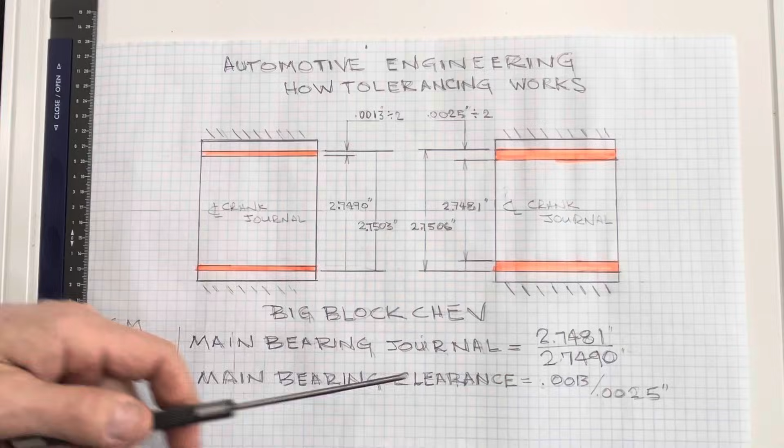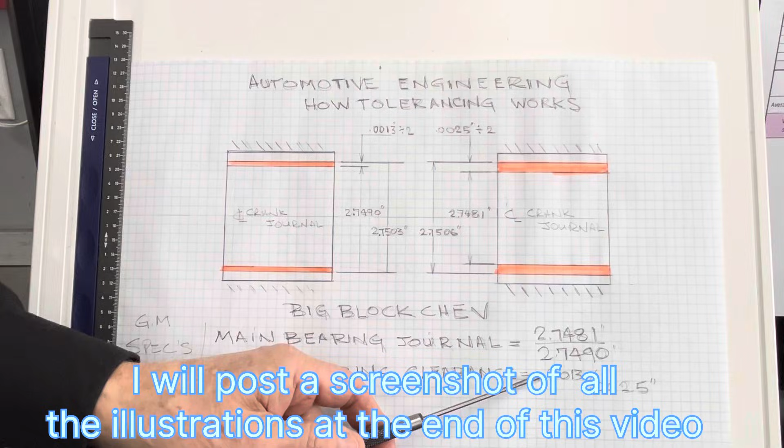So there's the crankshaft. Even though the main bearing journal crankshaft nominally is 2 3/4, it could be anywhere from 2.7481 on the low side to 2.7490 - so almost a thousandth, 9/10,000ths of an inch variation. Then the main bearing clearance, factory OEM, is 0.0013, 1.3 thou, to 0.0025.

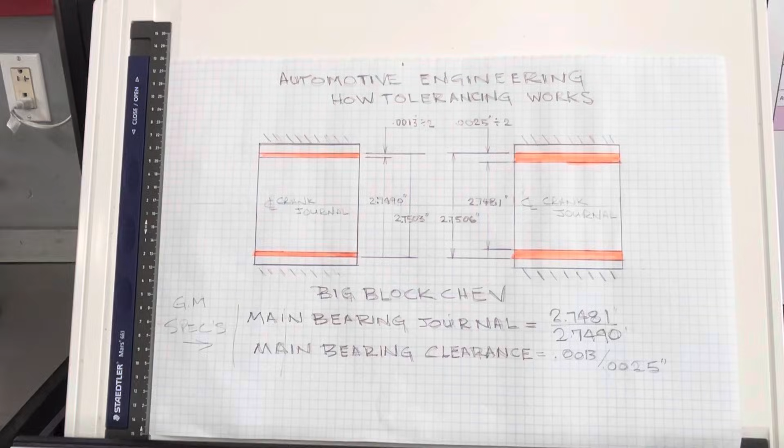So it could be as low as 0.0013 to 0.0025. When we blueprint an engine, we do a couple things - typically we add a little more clearance, but you have to be careful, you can't add too much, and I'll show you why.

If the clearance is too tight, 0.0013 would not be acceptable for Al's 454, because that's not much clearance - the oil can heat up too much, there's not much space, it can't support it. In a high stress situation, the crankshaft may touch the bearing, and once that happens, it's game over.

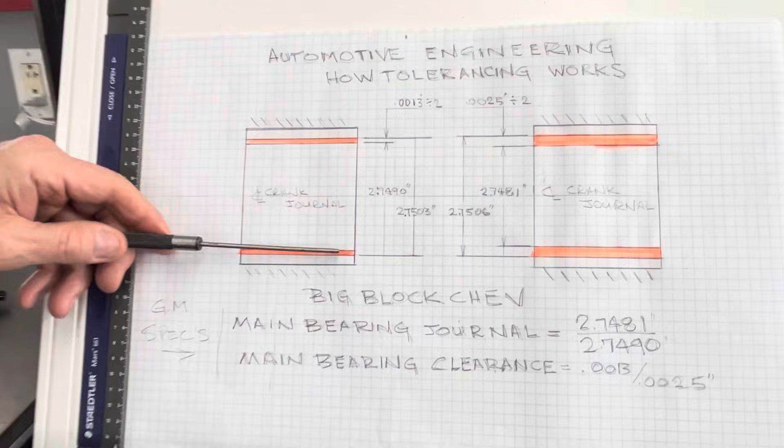Let's look at that application right here. So what I've done is I've drawn - the only thing I painted is the orange line, and that is the oil flowing. That's your crankshaft journal, this is your bearing here, that's your crankshaft journal, and that's the oil film.

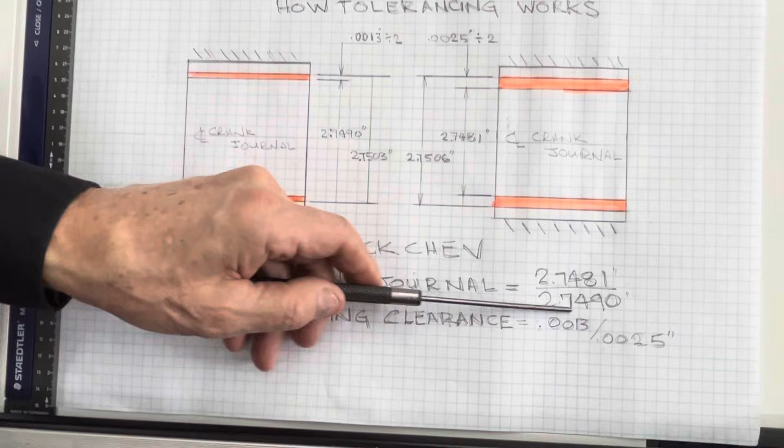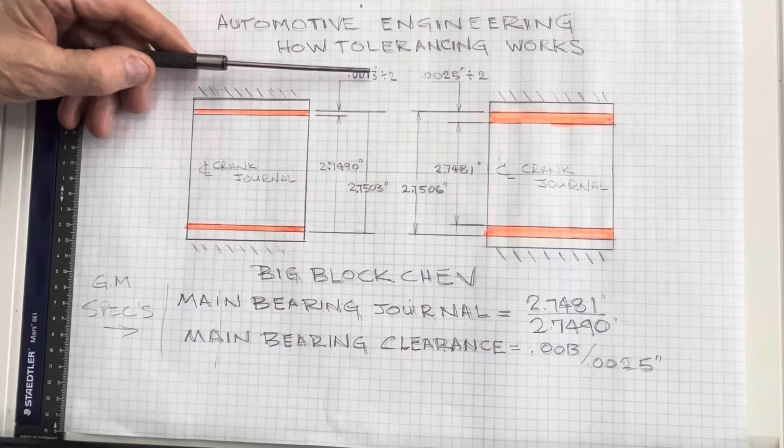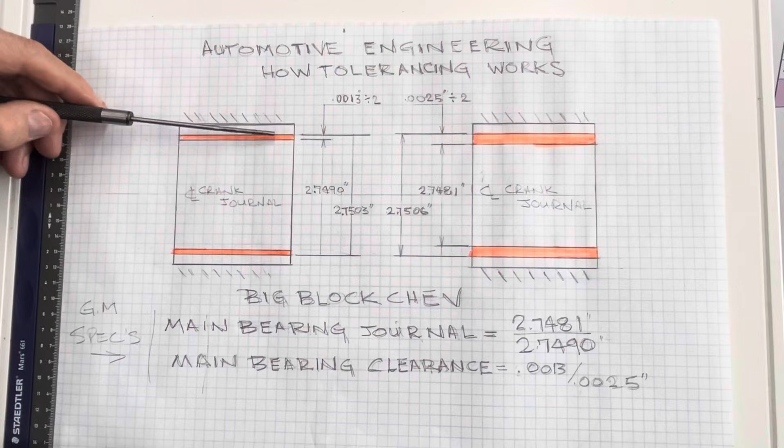So the automotive factory tolerance is, if we have the largest crankshaft journal, that's 2.7490, and the smallest bearing, then we only have 0.0013 of clearance. Remember that clearance is divided by 2 because half of it's got to be on each side of the bearing. When you take the dimension, the difference is 0.0013, so only half of that is on each side. So the film of oil between the bearing and the crankshaft journal is less than 1/1000th of an inch if you follow the factory tolerance.

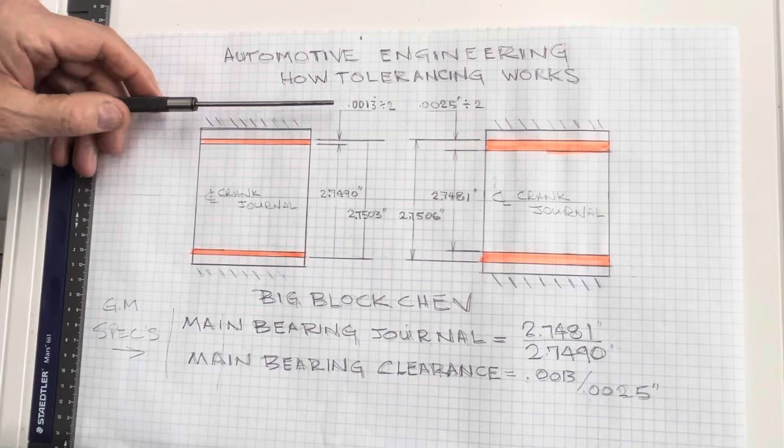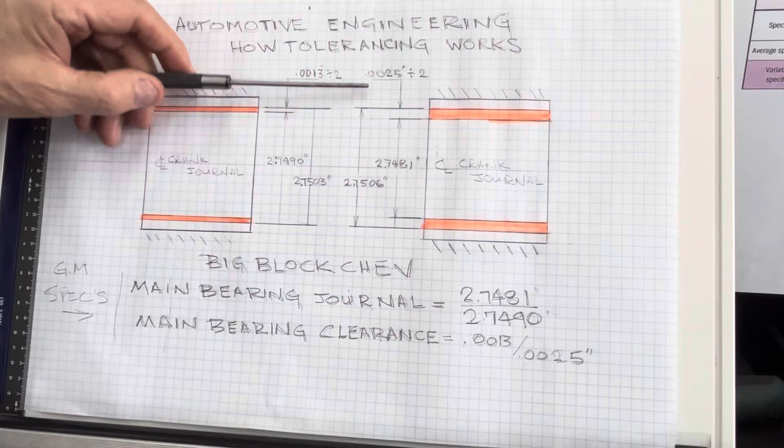So in the factory, they're okay with that, and there's lots of engines running around with 0.0013 clearance doing fine. The next side of the factory tolerance would be if you had the smallest diameter crankshaft, 2.7481, and the largest bearing. Then you'd have 0.0025 clearance, divided by 2, with half the clearance on this side and the other half on that side.

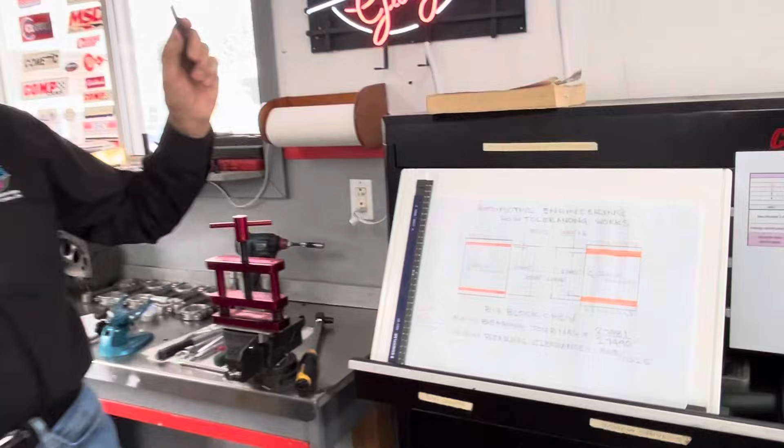So that's more desirable. The other thing is you have a variation from 0.0013 to 0.0025, 12 thousandths of an inch allowable variation. So in blueprinting, we do a couple things: we want a little more clearance, and we don't want as much variation. That's the OEM tightest and loosest side.

Now, if you're too loose, there may not be enough oil volume flow. Oil pumps don't make pressure, they make volume. The pressure is created when you have resistance. There wouldn't be enough to support the bearing. In an ideal world, the crankshaft journal never touches the bearing. In reality, it doesn't, and it shouldn't, other than instantly after startup maybe, because when you shut down, the crankshaft may sink into the bearing. But when it's turning, it's going to be off that bearing, so that's how it should work.

However, when we blueprint, I don't want a range of 0.0013 to 0.0025. Ideally, for an application like this for Al, 0.0025 to 0.0030 is an ideal clearance for a main bearing for Al's 454.

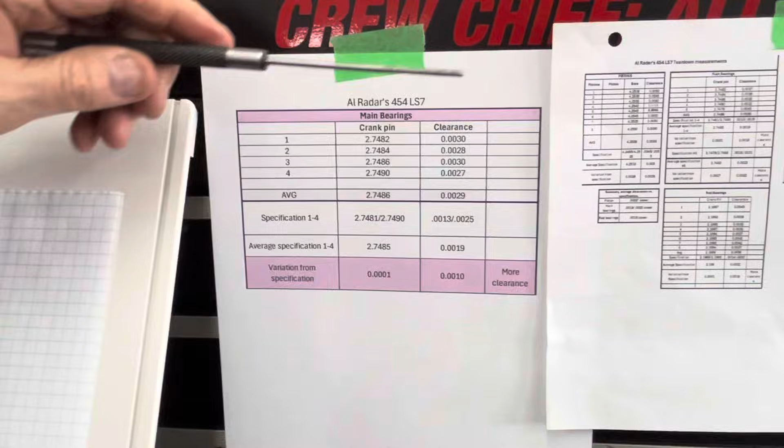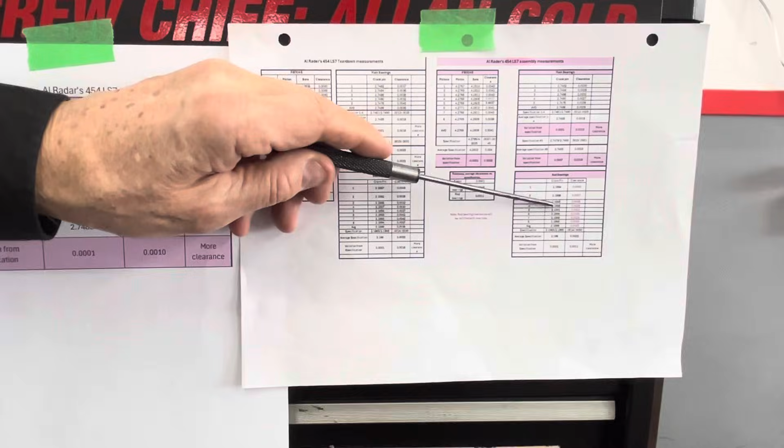So over here is what I've done. I've blown this up, so this sheet is the total chart of all the dimensions I've taken on Al's engine so far, and we're not done, we still got work to do. These clearances shown down here are too much, so I've actually ordered undersized bearings to correct that, because that clearance is excessive. So this block here is blown up to be this block here.

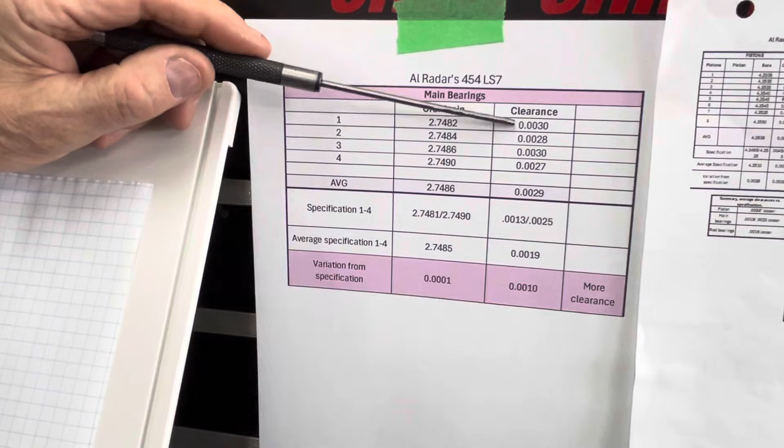So here's what we've done now. There's the crank pin dimensions. I've taken an average of them, 2.7486. And there's the clearances, I do them with the dial bore gauge, I'll show you that. 0.0030, 0.0028, 0.0030, 0.0027.

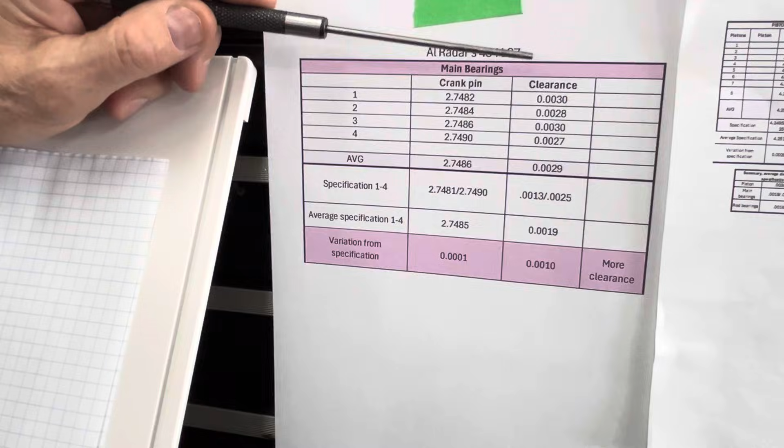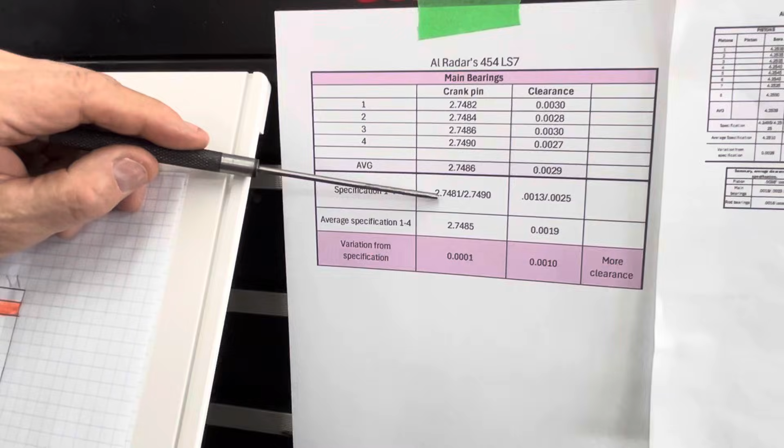Now I've only shown main bearings 1 to 4 because number 5 main bearing has a different specification. Why is that? Because number 5 main bearing is wider, so typically it has more clearance. But focusing on 1 to 4, there is a specification for the crankshaft journal. Once again, I already mentioned that, that's exactly what I was talking about.

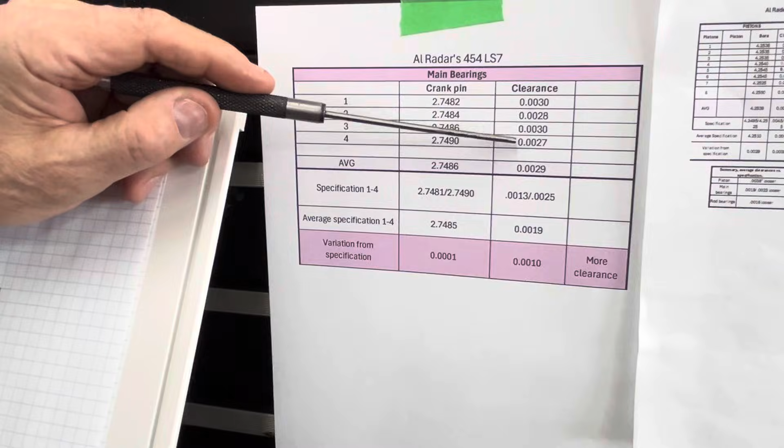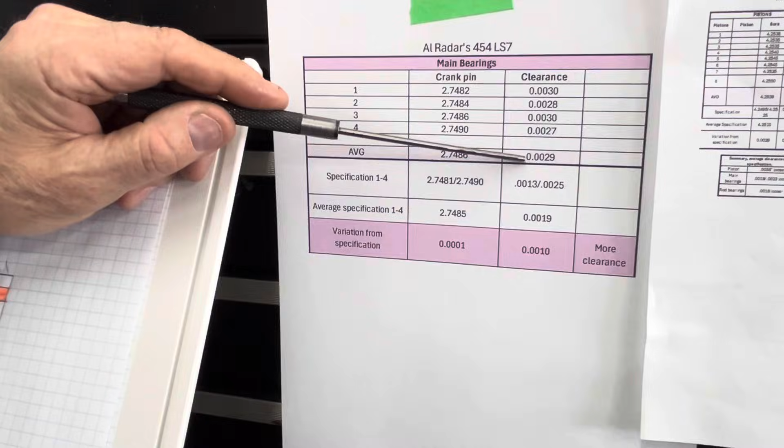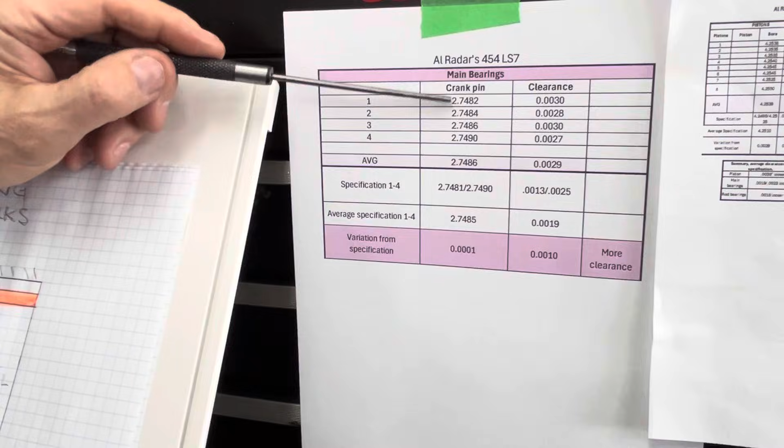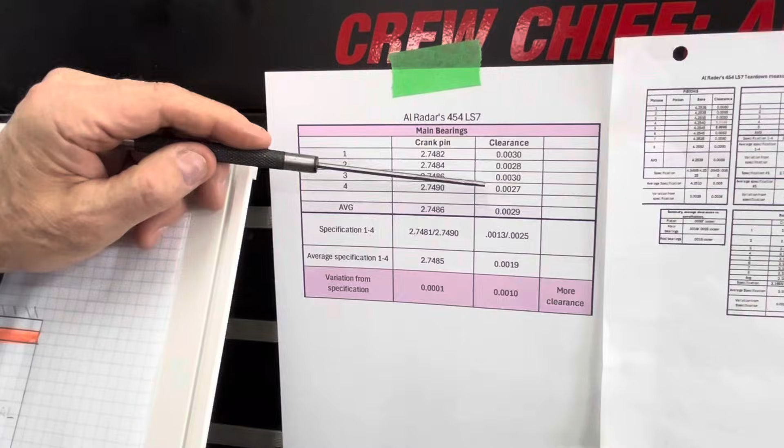Now my clearance, there's a specification, but my range is only from 0.0027 to 0.0030. So the average specification is 0.0019, my average is 0.0029. I've actually got a thou more average clearance and a shorter range between maximum and minimum. Here there's 13 thou, here there's only 3 thou. So that gives you a tighter clearance in the specification, tighter range between maximum and minimum, and a little more clearance in the range that we want - 0.0025 to 0.0030. Hopefully that makes sense.

Now, one of the things that's important to know is, it's nice to know all that, but you have to be able to measure it accurately. So there's a number of ways to measure what that clearance is.

The old way, I guess, or the way that I started off using, and a lot of guys still do that, it's okay, it's a lot more work to do it that way. It's called Plastigage, where you insert a little piece of plastic between the bearing and the journal. You torque it down to spec, and the width of that dimension is measured when you take the bearing cap back off.

But there's better ways, and probably worth thinking about, and that is a dial bore gauge. And if you have a dial bore gauge, you need a micrometer. Now, for some, this might look intimidating. These are not that expensive, well under $100 anyways. But, of course, if you're going to have a dial bore gauge, you need a micrometer to measure off.

So here's the reason why: when we measure the clearance that we're after in this journal, we don't even care what the dimension of the crankshaft is.

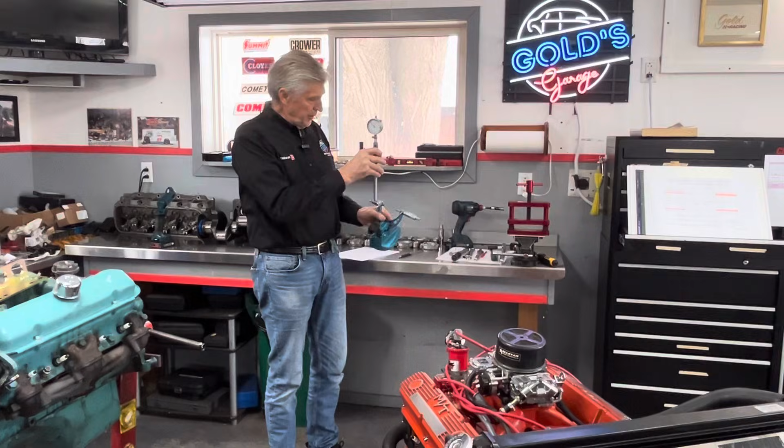I've shown this in previous videos, I don't have one apart right now to show you, but when you do that, it tells you the clearance. That's all you need to know. So in this case, it's between .002 thou and .0025 to .0030. As long as it's in that range, we're good to go.

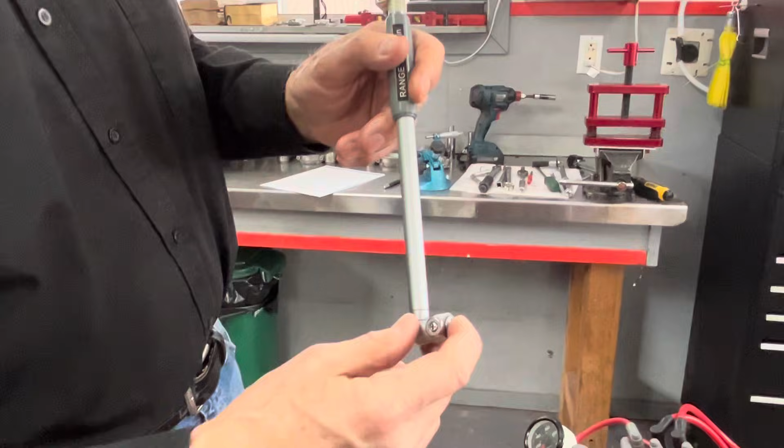So how it works is this: there's a little prod here. When you insert that into the bearing and rotate it, it rotates this little guy, and that tells you how much difference there is between the bearing space and the crankshaft journal you measured. Hope that makes sense. That's the way to do it accurately.

The way I do it, and I'm sure every professional engine builder does it, gives you accurate measurement, also a lot faster than Plastigage. If you go back to the old days, we used to measure the bore with one micrometer, measure the diameter of whatever the piston or crankshaft with another, and subtract one from the other. Obviously lots of opportunity for error, with two measurements and then the calculation.

Whereas a dial bore gauge, pretty simple. It doesn't really even matter what the dimension of the crankshaft is. The only thing that matters is what the clearance is. So that's applied to every important dimension in the engine: the main bearings, rod bearings, the pistons.

Piston clearance is measured exactly the same way. You measure the OD of the piston, and use the dial bore gauge in the bore, and that tells you what the piston clearance is. And I think there's another one - I had to go to my cheat sheets here to see if I can remember what it is.